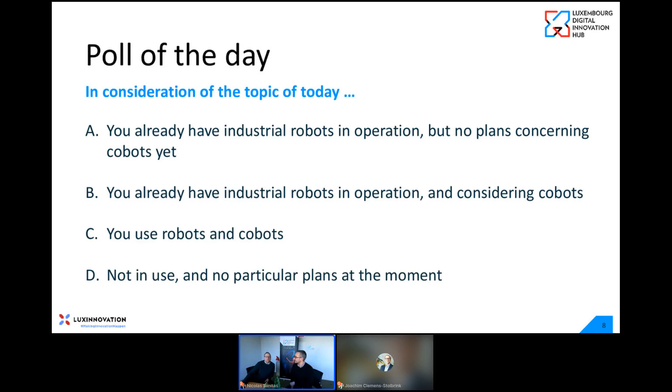In the next slot, after the first speaker, we will present the results with you.

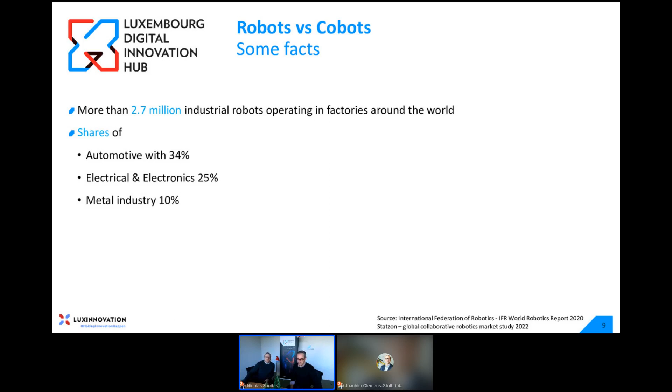Now, just getting into the topic, what might surprise you in case you are not so much into the statistics about robotization on a global scale: according to some international robotics data, more than 2.7 million robots are in operation across the globe. No surprise besides the high number, most of them are used in automotive, but particularly important, you also see a quite high rank for metal. And as we know from our ecosystem here in Luxembourg, we have many manufacturers actually dealing in metal.

Then looking to the installations, that's also a bit of a demystification in my opinion. 73% is in those countries, and not all of those countries are known for high labor costs. So there must be other reasons to use robots.

Quite interesting, last but not least: in some countries, the density of robots per employees is quite high. Three of them are from Asia, two are from Europe at least. Also quite an interesting number.

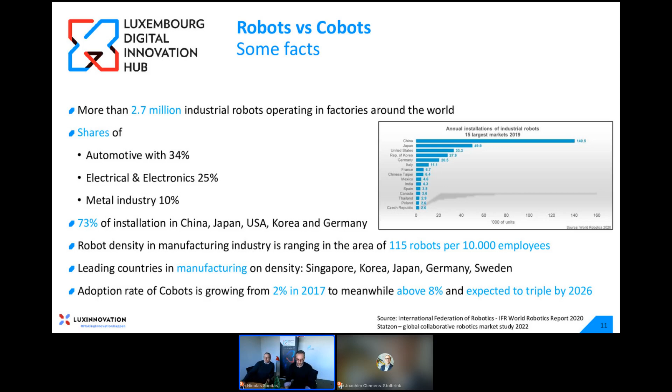And now finally coming to cobots. Of course, cobots is a discussion and solutions you find from the larger OEMs for many years already. We have one OEM present today. But the numbers are really increasing sharply, and there is even an expectation that by '26 the installations will have already tripled. I hope that the speakers of today can help us better understand why this is the case.

I'm really happy to introduce the first speaker, Paul Rivus, who is the Managing Director of FANUC Benelux. Knowing Paul for quite a long time, I know that his DNA is really about mechanical and electrical engineering, and he has been in this market of robots for more than 20 years. I'm really looking forward, Paul, to listening to you and seeing your presentation. The floor is yours.

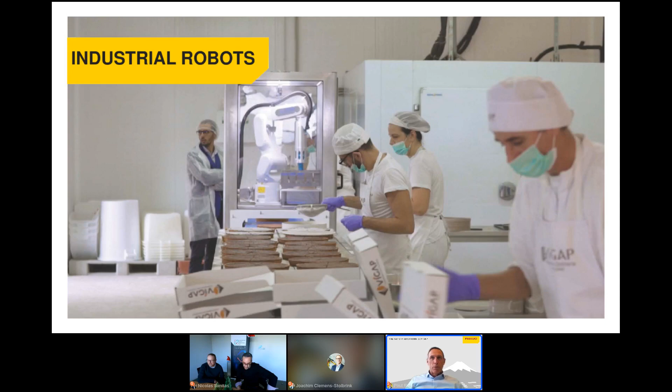I hope in the next 10-15 minutes to give you a little bit deeper insight into industrial robots, what you can see on this picture. But for sure, today we also want to talk a little more about collaborative robots. When you start looking at the first page and the second page, I think most of the people here attending this nice event already directly see the difference between the two.

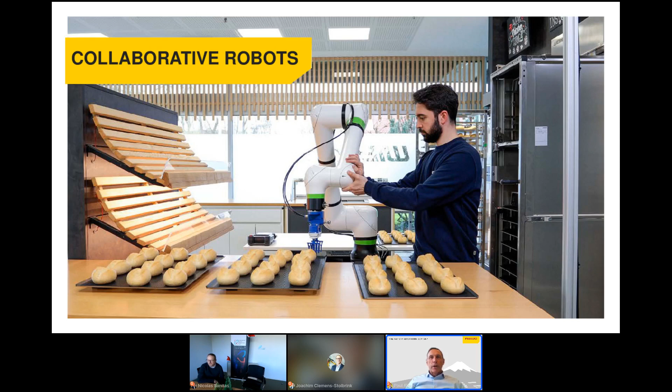Before going more into the differences, I think it's good to first talk a little bit about industrial robots. I don't know the background of people attending this event, but let's talk mainly about industrial robots.

We see that axis speeds are very high for industrial robots. That's very simple. We start from 4,000 millimeters per second, but we can even go up to 11,000 millimeters per second. So this is really a criteria which is typical for an industrial robot.

On the other hand, what we also see is that, in 100% of cases - and I think this isn't 100% correct anymore today, but still today in about 70% of cases - industrial robots are always working behind a safety fence.

And a last item, which is for sure also an important one, is that for industrial robots there is a wide variety of models. You can see it on the pictures. We start with, on the left side, the articulated. You have SCARA, Delta, paint robots. So you see there is a wide variation of models.

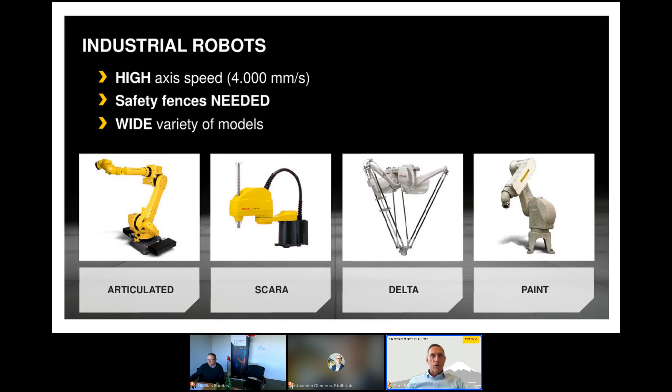When I only look at our product range, we have up to 150 different models, going up to a 2,300 kilo payload. So there is a big variety of models available, from low speed to high speed, giving a big choice for any application.

When we now dive into collaborative robots, or cobots - and maybe we can talk a little later about the term 'collaborative', because today they're still called collaborative robots - a very typical criteria is that the axis speed is much lower than for industrial robots, maximum 1,000 millimeters per second. That's also normal, because there we really have the collaborative aspect coming into play.

In most cases, collaborative robots are not used with safety fences. And also there today we see the opposite happening. I think this is something I'd like to highlight a little later again, because this is not always the case.

What is also typical for collaborative robots, I think, is the variety of models we see. We really only have a small variety, and most of them are articulated, ranging from a lower payload up to, sometimes, 35 kilo. So this was a first insight into the differences between industrial and collaborative robots.

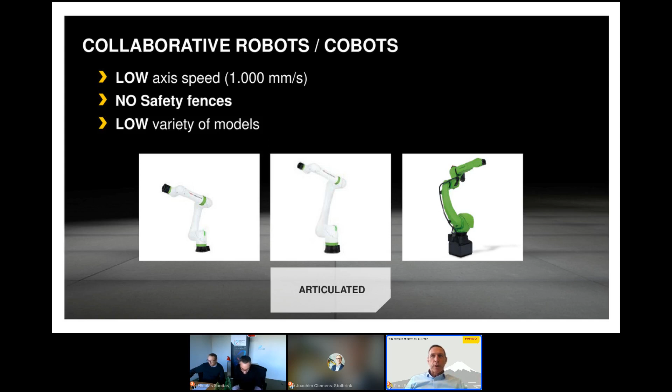But then I'd like to go a little deeper into the main differences - what are really the main differences? Sometimes there isn't a real difference, but I still want to call it out. I want to show you, in a few short slides, four topics where you might think there's a big difference, but I still want to highlight it.

So if we look at programming, on the left side, for the industrial robot, most programming today is done via what we call the teach pendant. This is what you see in the picture, what the operator has in his hands. He's mainly doing teaching, programming via the teach pendant.

On the other hand, with the collaborative robot, we see a big difference: the operator is really moving the robot by hand. And then you think, okay, here there's no operator or teach pendant needed anymore.

I think this is the big thing that's been created in the market by the first collaborative robot builders - that it's very simple programming, just by moving the robot by hand. But it's important to know that, in the background, it's only the moving program. When you create a program, you have the movement, but you also need to build the interface with all the peripherals, and for that you still need a teach pendant.

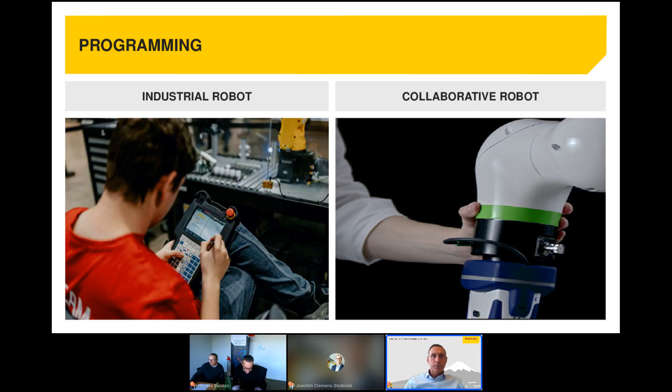So, moving to the next point, you still have a teach pendant also for the collaborative robot.

If you see on the left side and the right side where you see the collaborative, you see some differences, and I think this is also normal. Today we have a newer generation of people. They are used to mobile phones, working with tablets, and this is also what I think we as robot builders have done, especially within Fanuc, is also how can we bring this new intuitive interface over to the younger generation, make it nicer and easier to use for these people. And that's what we have created.

And what you see on the right side is really a drag and drop interface. So you don't really start programming with lines and codes. What you do on the left side is where we still have the older generation of teach pendant, where you still do programming with predefined codes, let me call it like this. Now, I also want to make a strong remark that even today, this drag and drop programming, what you see for a collaborative robot, we can also use on our industrial robots. So this is already possible. So if you see the main differences, they become smaller and smaller.

What we also see is that a lot of programming is done offline. So with most of the offline tools we have available, you can do all the programming offline, and only the small fine teaching will be done on site.

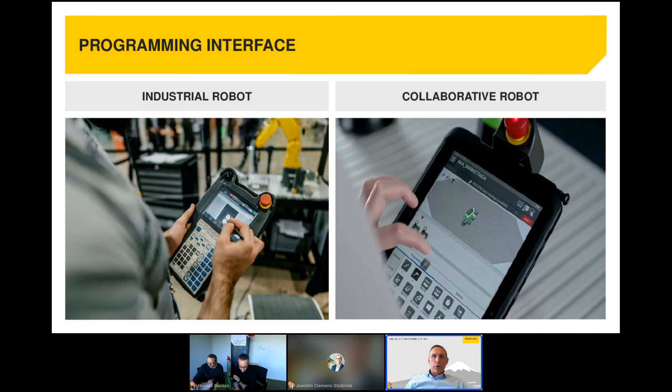If we then see another difference, and I think this is maybe still the highest main difference between the two, it's flexibility. And I don't mean flexibility in the operation, what a robot can do, but mainly in how flexible you can, for example, move a robot. What we see for the industrial robots, they're really designed for a project, for a product, and fixed to the floor and stand there for the next 10, 15, 20, or even longer years. When we see the collaborative robot on the right side, because of the smaller variety, the payload is also less. That means the size of the robot is smaller, and they also need a smaller frame to move.

And it's important to understand, coming back to one of the first pages, that the speed of the robot, whether it's 4,000 millimeters per second for the industrial robot, or 1,000 millimeters per second for the collaborative robot, when you move slower, that also means the infrastructure needed to mount your robot can be easier, can be lightweight, and it's also one of the bigger advantages for the Cobot today.

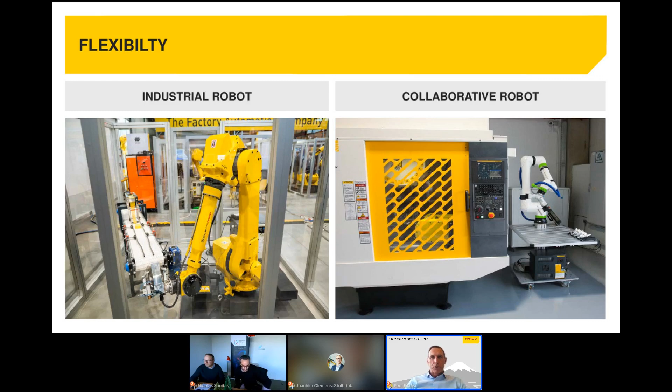If we then look at accessibility, I think this is also something where we see today the collaborative robot has some advantages, because of the low speed, no fences are mostly needed. On the other hand, the industrial robot, with its high speed, the tooling is mostly not well equipped for cooperative working, so therefore we always need fencing. So the direct accessibility to the robot is different.

On the other hand, today, when we look at industrial robots, there are already software features where you can make a kind of semi-Cobot, where you can work together with a robot, but when you enter a certain distance, the speed of the robot always goes down. And if you enter too close into the work environment of the robot, the robot will even stop. I think this is a big difference between the Cobot and the industrial robot. A Cobot will remain working - even when you're close to the robot, it remains working. This is different with the industrial robot.

On the other hand, the collaborative robot, as we said, is lightweight and easy to use, and with speed, they have sensors inside where impact will be detected, where the robot will stop, so you can work in a safe environment.

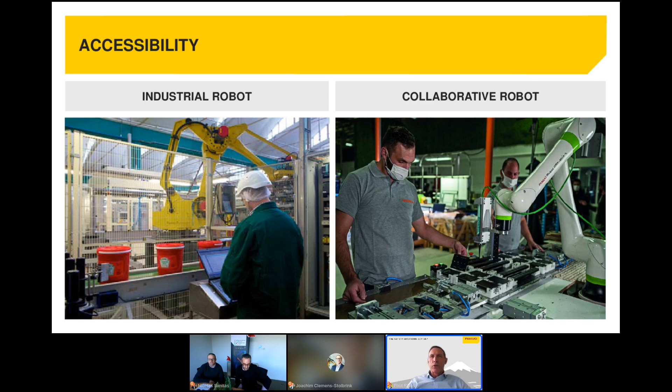So then I think, after all we said before, the question is: okay, but what robot do I need to choose? There are some small criteria which we always see coming back, and I've highlighted here 4 elements which are important. First of all, you start with what is the cycle time, because this is really defining for you. If you have a high cycle time, it's very illogical that you would start working with a Cobot, unless you have so many robots to reach the cycle time, but this is mostly not the case.

So this is a very important topic. The next one, in line with the first, is production volume. What volume will you handle in a certain time frame? This also makes part of the cycle time, so these two are very close together.

A third point is the part variation, where we look at size and weight. These are very defining for selection of the robot. When you go above 35 kilos as a part, and even with certain dimensions, you cannot even use a Cobot anymore today. You really have to go with an industrial robot.

I also wrote down location, and what I need to clarify is: what is the reach you need? How far is the part away from the robot? So even sometimes you have a low weight, but the part is maybe 2 meters away from the robot. So you need a bigger robot to do this.

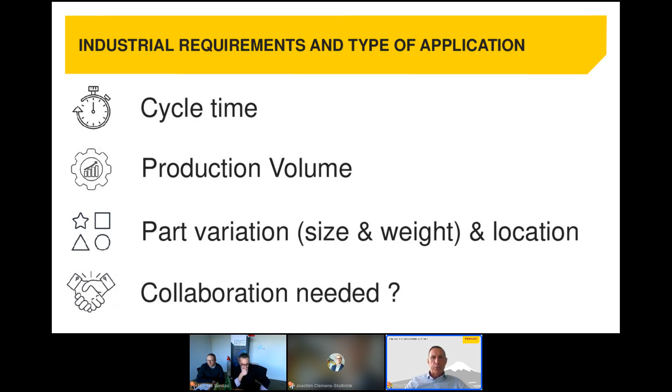This is also a little driven by the Cobot builders today, showing this on exhibitions by the hand movement, giving the perception that a Cobot is easier to program. There is some advantage, of course, because it's lightweight, but be sure that industrial robots are also very simple to program. So this is a highlight.

Then I think also two important things is the work setting. What space do you have available in your factory? Do you have a huge facility with huge work floor space available? Does that mean you need to install a big robot? No, not always. Maybe you only have a small space, and again, in industrial robots we also have very small robots which can be used.

But the main topic, and this is something we already touched on, is of course the safety. Is fencing needed, yes or no? But still today, what we see with Cobots, and this is very important, is that when you're using a Cobot, or want to use one, maybe the Cobot itself is safe, but your peripherals around should be safe too. So it doesn't mean that because you start using a Cobot, everything around it is automatically safe. No. So the CE certification, to really do it properly, is sometimes much more difficult than for an industrial robot.

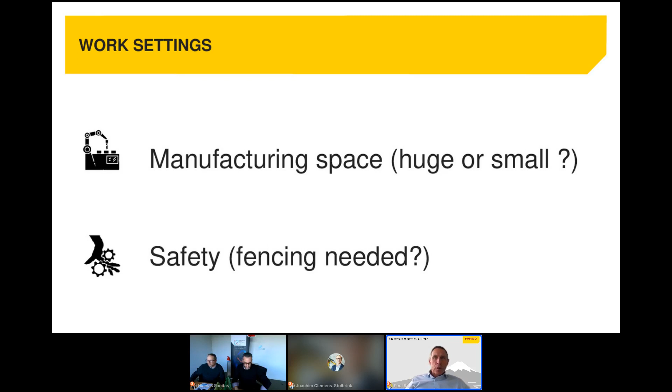To finalize, for conclusion, I think you first have to investigate what you want to do. It doesn't mean you always need a Cobot. Today the trend is people think they need one, but it's important to understand: what do you want to do? Can I make it safe? And do you really want to go with a Cobot? Again, look to the application, what do you want to do, and based on this you can make the right selection.

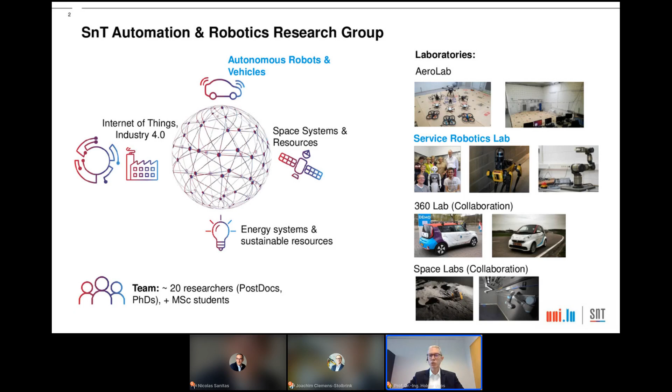We are also working a bit on autonomous driving, and last but not least, also on space robotics, where we recently have built up some very nice labs.

Today I would like to motivate my presentation with a practical use case, motivated by a partnership we have here in Luxembourg with the company Rotarex. Rotarex is kind of world leader in the production of valves for gas bottles, like the bottles you have for oxygen, medical applications, and so on. Looking at these, they are not too big, but surprisingly complicated — one of such valves contains more than 80 parts.

Here we have a typical case of mass customization. That means Rotarex has many product variants, but with very small batch sizes. If you remember what Paul was presenting about the characteristics calling for a cobot, I think this is also among the criteria — mass customization requires very flexible robot operation.

In these products we have very challenging assembly processes. We have very small parts of different materials, parts of different sizes down to very small parts. We have very complex assembly steps. We have a high speed — not super high speed, which would require an industrial robot — but we also have a demand for higher accuracy.

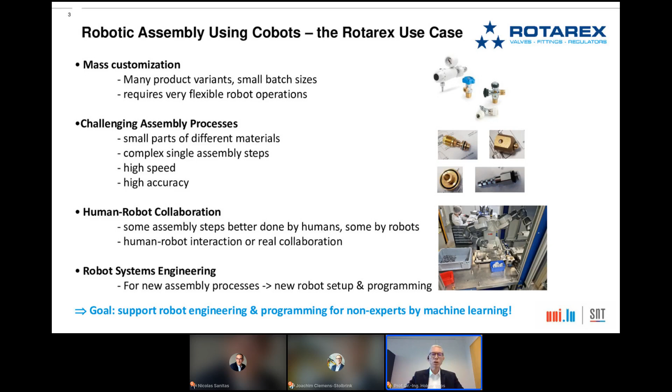So our approach, roughly speaking, contains two parts. One is considering the vision system, because the robot has to detect the parts. Flexibility means a lot of parts are just poured on a pallet, and they don't come each time at the same point where you can always pick them — they're just poured on a pallet, and the robot really has to detect them.

This pick-and-place task starts each time from different initial positions where these parts are. That means it's important to have a vision system — to determine what part to pick, where to pick it, and especially for the robot to see where the grasping points are, for a huge variety of more or less challenging parts.

On the other side, we have the programming or moving part, where first of all the overall assembly task needs to be planned. Here we are trying to apply learning from demonstration — a bit like a bicycle. If you'd like to ride a bicycle for the first time, as children, the first thing parents do is sit on the bike and show the children how it's done.

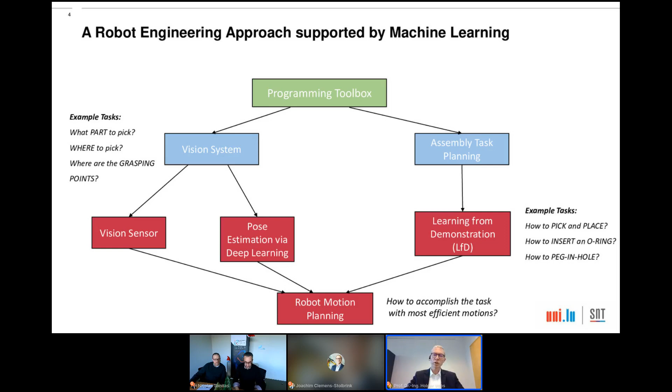Okay, first the vision part. I think the nice thing with this application is that it covers all the different possibilities of machine learning. What we are applying here for the vision system is deep learning, or supervised learning.

That means the idea here is we demonstrate these objects to the vision system, but in a labeled form. We always tell the system that should learn, okay, here this is the part, but if you see the part under this aspect, the point where you have to grip it is here. And if you would do that with the real object, it would be a huge effort, because you'd have to take thousands of images from the real object and manually label that, which is very time consuming. So what we are doing here is we try to automate that.

What we first do is create a photorealistic simulated object, which you can see here in the middle. And if you compare the real object with this one, you'll see that nowadays there are tools which give you a very realistic simulated object. And since this is all digital, it's much easier to label that.

Then you have all the inputs that you need for deep learning a neural network, which is learning from the objects plus the labels. At the end, the vision system is able to detect, or at least estimate, the pose, meaning the position and orientation of our workpiece, in order to transfer that information to the robot to pick it.

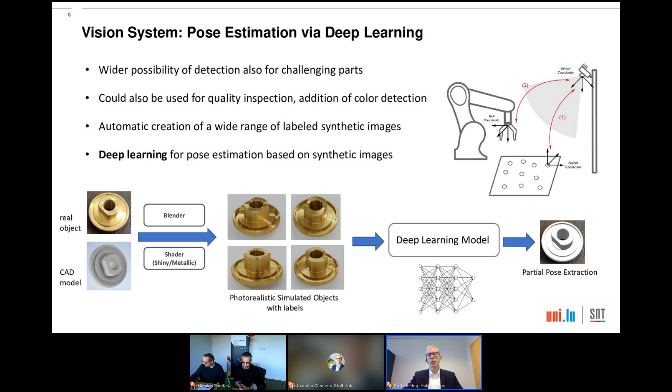So second, now we come to the other side, the motion part. What we are applying here, as I already said, is learning from demonstration. We have a human demonstrator - there are different ways to demonstrate that - and then the robot should learn from that demonstration without any need to hard code very complex tasks.

From a research point of view, what is really interesting is how to learn this human-robot collaboration - to see or even detect which subtasks are performed by a human and which parts should be done by the robot. One idea is to somehow give additional information to the learning system during the demonstration. The subtasks are then learned using

a tricky technique called in the literature dynamical movement primitives. It's a bit like assuming you would like to follow handwritten letters. Say all of us would write the letter L, each in a slightly different way, but behind that there is your typical kind of movement of the pen. If you then really apply that, you would always start on different pieces of paper, at different positions, and so on.

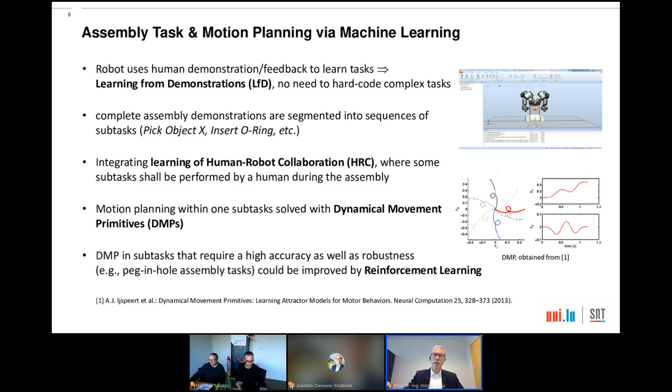And then finally, once this is done, for a kind of fine tuning we are also applying reinforcement learning - a third possibility of machine learning. I will very briefly show that in the next slides. First, this kind of learning from demonstration - how are we doing that?

Here we really profit again from cobots, because as Paul was already explaining, you can switch them into compliant mode, and then you can take the robot arm and move it. So we are demonstrating the tasks, and we record all of this data, and then we generalize. That means we learn, and by learning we generalize. As you can see, in the lower part, the robot can then finally replicate this motion, but in a very flexible way.

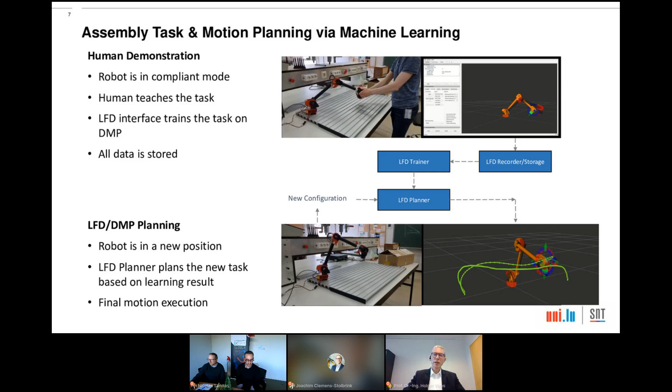Another possibility coming from machine learning is reinforcement learning. Take the bicycle example again. If you are for the first time on the bike, it's a bit like learning by doing. You start, you see the effect that your action has on the bike, and then this is either good or not good. If you fall down, that's not good - that means you get a negative reward. So in such a reinforcement learning environment, we have the robot controller, or an agent, which tries to improve and learn.

They are creating actions, meaning commands to the robot. The robot is moving in the environment, moving to another state, and then there's also a reward - a function we call the value function, which says how good this is. Finally, given the current state, the control action should be changed or learned to maximize the estimated future reward. That means you try to become always better.

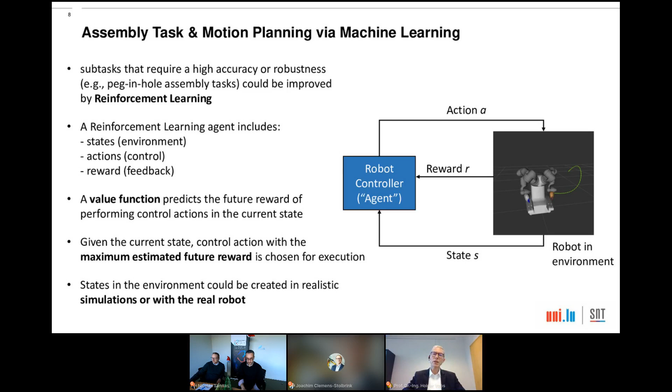Just to summarize, I would say there's definitely high potential for cobots, especially in mass customization and complex assembly or manufacturing processes. But engineering and programming cobots is still challenging - it's easier, but still challenging. What I tried to demonstrate today is that there are already nice helping tools which, based on machine learning, would allow a process engineer to program such a robot without classical hard coding. That's the idea behind it. Thank you very much, and I'm open for questions if there's still time.

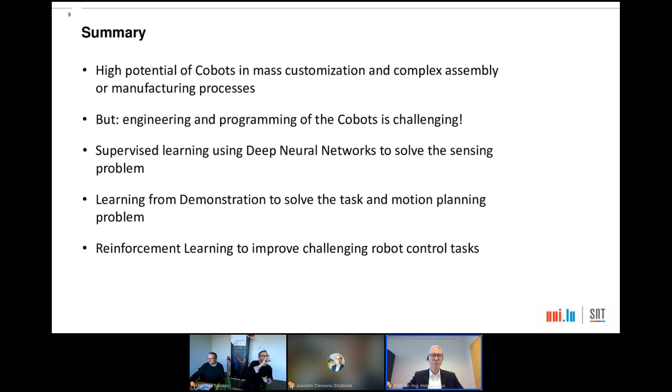Indeed, there are a few questions, Holger. One is quite interesting because it goes straight to the DNA of the SNT. You have the team working on computer vision, and you have your own team researching automation and robotization. Can you explain how you collaborate together?

Yeah, I would say taking the computer vision part - first of all, of course we collaborate between the teams, it simply depends on the tasks. In my group we also have some knowledge about computer vision because we need that - if you'd like to program autonomous robots, a key part is sensing. We already have experts in the team dealing with computer vision. The key question is whether we're talking about totally new computer vision algorithms - then we also have experts here in SNT, and we collaborate. If it's more about applying computer vision to given problems, like a robotic task, then we already have the knowledge in the team. So we are flexible, but it really depends on how deep we need to go into the research parts.

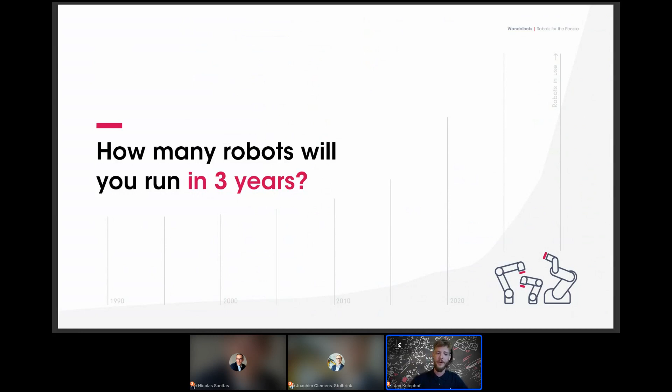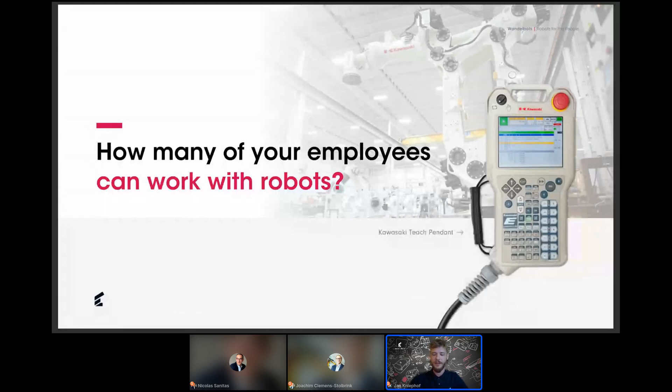So with all these topics, we speak about the future, and this comes along with the usage of robots in automation. There is one thing that often scares companies away from the subject of robots: how many of your employees can work with robots? When I talk about working with robots, I mean setting up a robot, even programming a robot, or at least working with it on the shop floor. These are some thoughts that come up, but there are many more.

Right now you need a robot programmer for robot automation, so you need experts, and these experts are very rare on the market. There are many different brands of robots, and most importantly, every single robot manufacturer has their own specific language. Companies really want a return on investment, but right now it doesn't pay off for small batch sizes. Training employees to learn how to program takes very long. So our goal is to make robots accessible to all employees in production.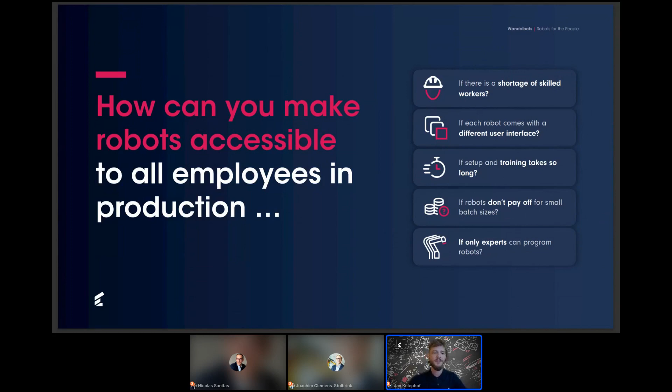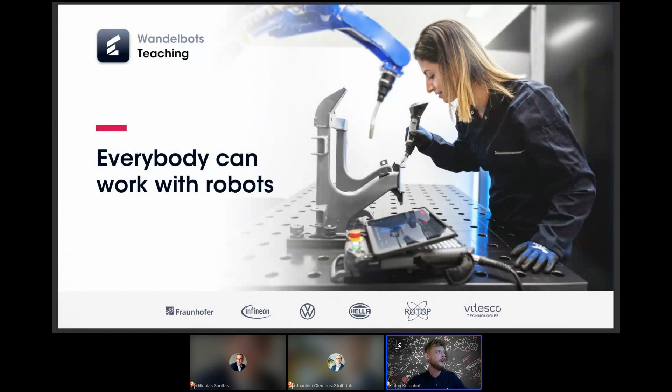We want to enable people, regardless of education, experience, or social background, to work with the robots. And how this can be done, I'll jump into our product, our Wandelbots teaching solution.

It is a symbiosis out of the trace pen, an intuitive device for all applications, and the core of our solution, the software with the associated app that comes on the tablets.

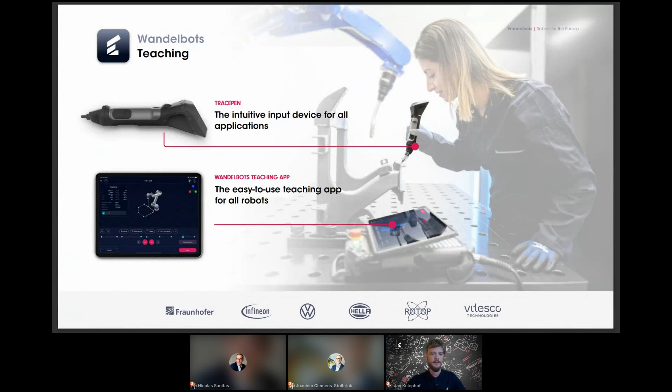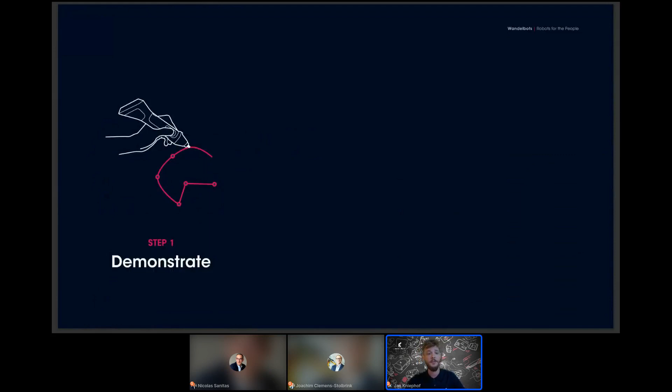So we dig a bit deeper into the Wandelbots teaching. The whole process of teaching a robot works quickly and easily in 3 steps. First, we demonstrate the robot what to do. Next, we edit everything in our software. And third, you just run it from the robot controller, because with Wandelbots you export everything you did in the teaching solution to your robot-specific language, then run it from the robot controller.

And before I go more into detail, I would like to show a video. I hope everyone can see it so far. Perfect.

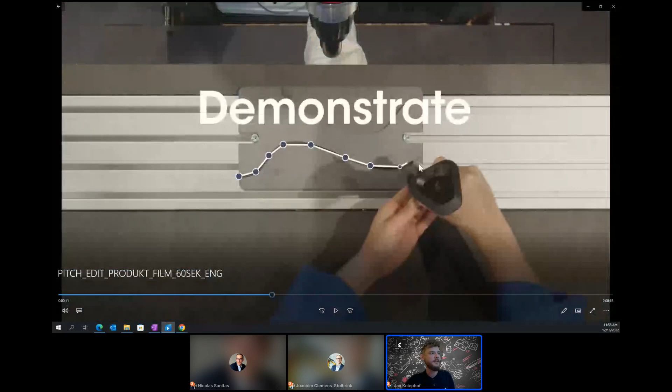This is the first step: you have the input device, the trace pen, and you demonstrate the robot what to do. In the second step, you edit it in our software, where you can see exactly the path you created or demonstrated with all the single points, and just edit it. Afterwards, you run it, and the robot will do it after you export the code.

And then here you can see it with a short input in the welding process.

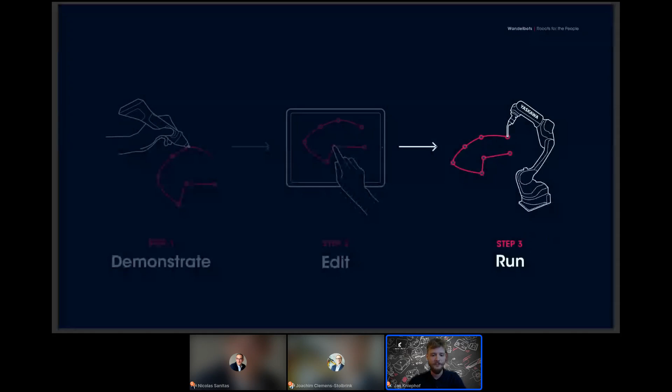Then we dig a bit deeper into the process. As you can see here, you take the trace pen, the input device, and show the robot directly on the workpiece what to do—for example, in this case, a new weld seam for the robot welding process.

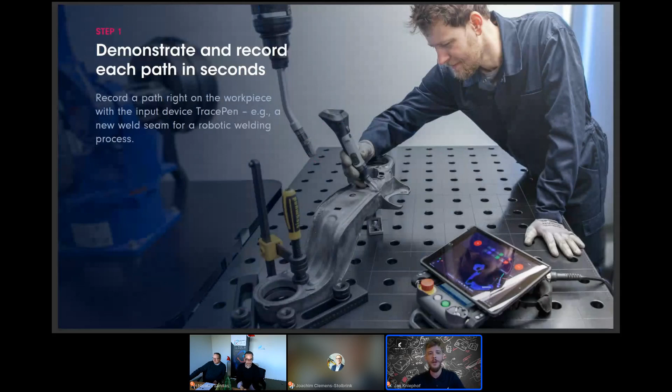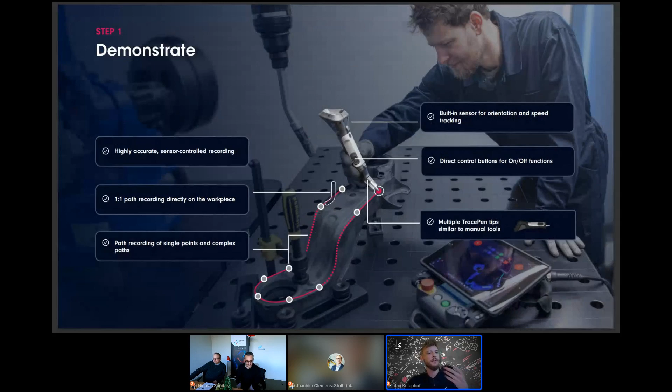How this is possible: we have built-in sensors in the trace pen for orientation and speed tracking. You also have on and off functions, and a one-to-one recording directly on the workpiece. You can easily set up single points or even record a complex path. That's the first step, to demonstrate.

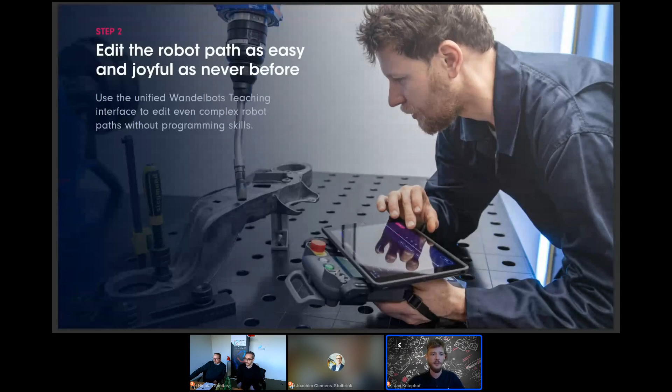The second step is to edit, and you do the editing of the path on the intuitive, easy-to-use graphic interface—it's a 3D simulation of the digital twin. As you can see here, you can change perspective, and you have all 3 axes, X, Y, Z, which are colored to guide you through the whole software.

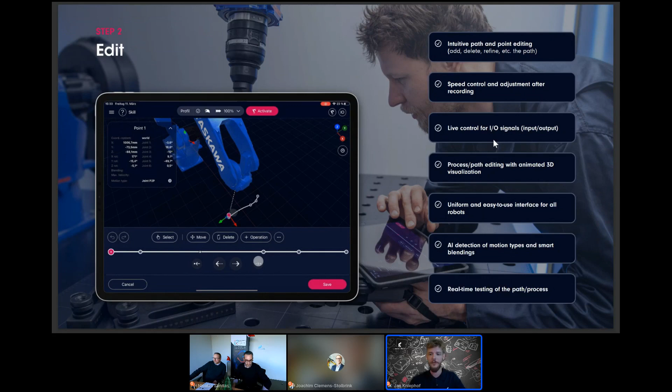Afterwards, you can edit the speed and orientation, and also the input-output signals, like arc on, arc off for the welding process, for example. And the third and last step is to export the code into the robot language and then run it from the controller.

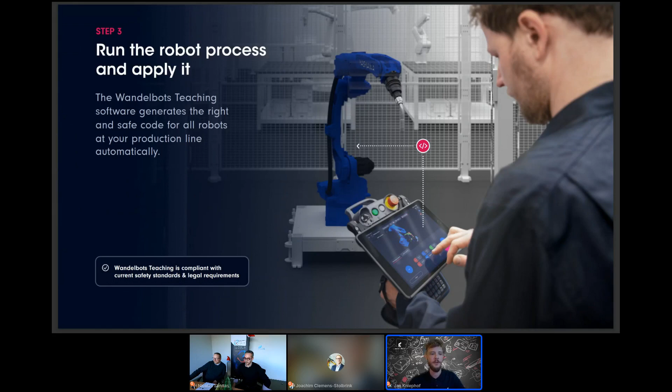But also our future vision with Wandelbots—we are constantly in an advancing process. We want to cover in the future all robot brands and all applications, just to combine everything under one language, and for applications as well, like welding, inspection, gluing, and everything going on with this.

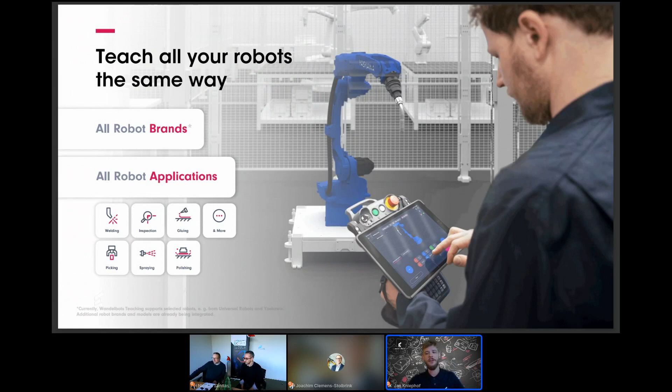Just to give an overview about what we are capable of right now and what we have already fully integrated: we have the Cobots on one side with the universal robots, fully integrated. On the other side, for industrial robots, we have Yaskawa, and as I said, it is continuously improving—the integration is ongoing right now with different types of Yaskawa.

The new one is the Fanuc, and we also have evaluation ongoing with different brands like ABB, Denso, Kuka that might come and will come in the future. And we also have different welding suppliers like EWM, Lorch, Miller, Lincoln, and Fronius.

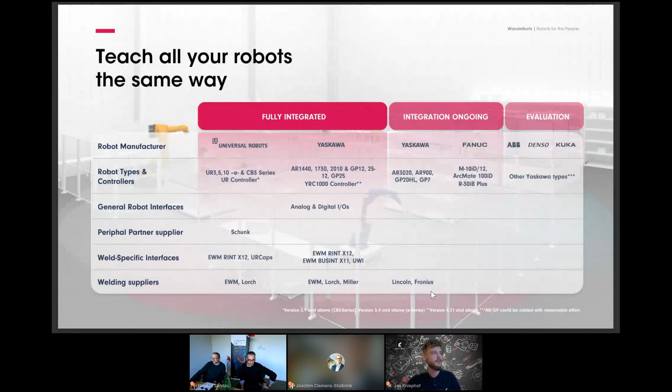So this was so far from my side—this is the Wandelbots teaching. Just to summarize, we really want to enable everyone, regardless of background or experience, to work with robots in the future. So thank you very much.

Thank you, Jan. Very interesting. I hope you can hear me. Yes, I can hear you.

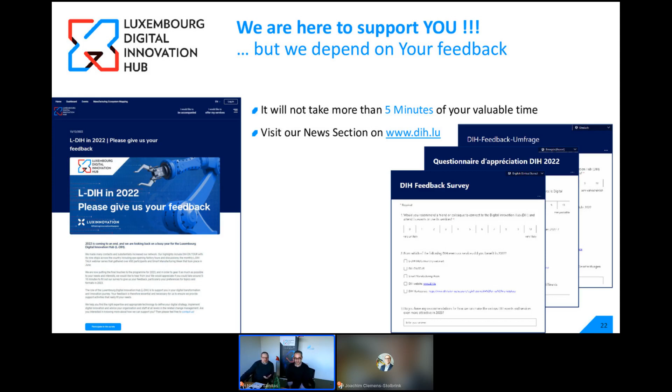Today shows how dynamic it sometimes is - we had more than 80 registrations but less than 40 participants. But we've also had webinars with more than 130. That shows we need your input to put the right program together. So please take the 5 minutes, it would be great.